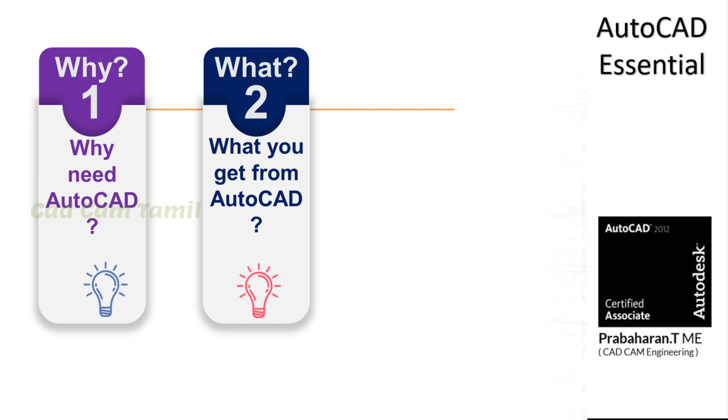Before entering into the session, let us discuss the basics of AutoCAD Essentials, why we need AutoCAD, what we are going to learn, and how we are going to approach it. First, let us discuss why we need this AutoCAD.

Before that, let us discuss the basics of engineering drawing. Now you have two drawings: one is a tree, another is a car. Let us make the difference between these two. The first one, a tree, is nature. The other, a car, is artificial.

In a similar way, the tree does not have any prescribed shape and size, while the car's each and every part has a prescribed size and shape. A car will move from one place to another; a tree does not move. We can describe the difference between these two in many ways.

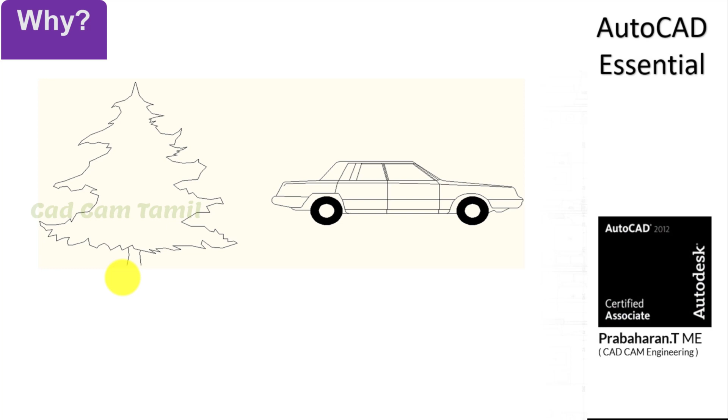So in general, in engineering drawing, we can say the tree is a sketch and the car is called a technical drawing. The tree does not have any prescribed size and shape, so it doesn't need any engineering tool at all to draw such a tree or plant.

But coming to the technical drawing, the name itself describes that it needs technical input and technical tools. Every part of the car has a prescribed shape and size. It needs some extra, specified tools, just like a compass, protractor, scale, to draw such a shape properly. That is why it is called technical drawing.

Why are we talking about technical drawing? This AutoCAD program is going to help you draw such technical drawings. Using the drawing only, we are going to fabricate, build, and manufacture. So we need a common platform.

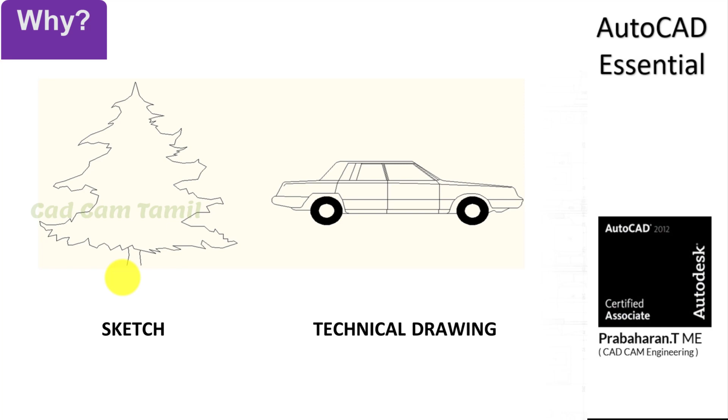Now let us discuss. Imagine we are going to build a new design or new car for the future. Before going to build a new car, let me know your basic knowledge of engineering. So we will do some kind of role play or funny kind of activity.

Let me ask you one thing: can you draw a rectangle? I will give you two minutes. Please draw a rectangle. I'm going to try with you now. Right, I've drawn a rectangle. Some of you drew it, some of you didn't.

Why? They need some more data. What is the data? They need some measurement, right? Now I'm giving the measurement: draw a rectangle of 50 cross 25. Now you have the measurement.

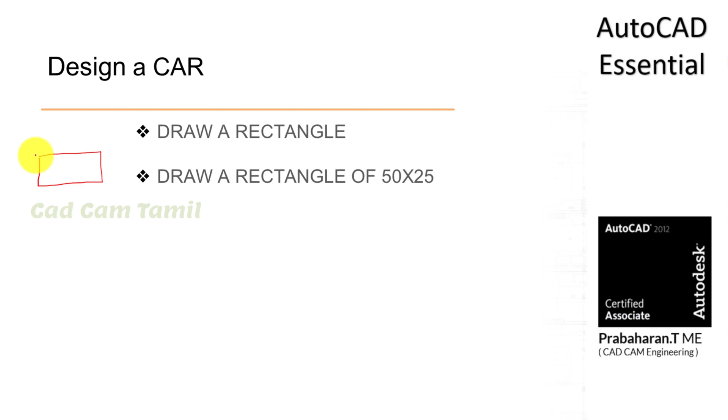Can you draw now? Now my second attempt, I'm going to draw again. I've drawn a rectangle of 50 cross 25. Still, some of you drew it, some did not. Why? They need some more input, some more data. What is that? I said 50 cross 25, but on what unit is this 50 cross 25? So they need a unit, right?

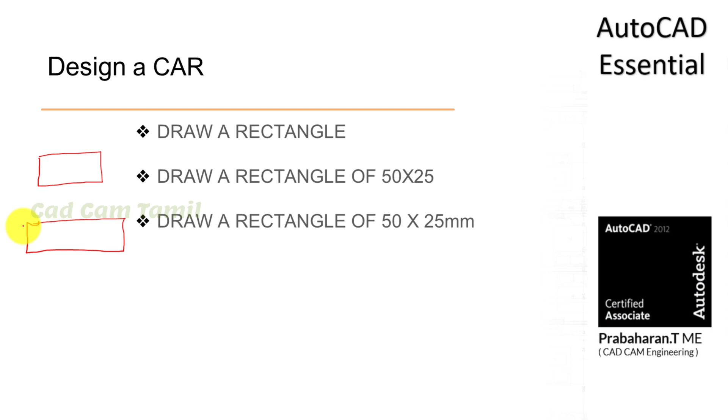Now I am giving a unit: mm. Now we are going to draw the rectangle without a steel rule, without a scale, because we are very familiar with those instruments since childhood. So you know how much 50 mm is, 5 centimeters, 2.5 centimeters. Keeping that imagination, we are going to draw a rectangle. As an engineer, we should have a good imagination capacity.

Now please check the rectangle you drew among yourselves. Somebody drew horizontal, somebody vertical, somebody inclined, all are rectangles only. Apart from that, some of your rectangles are small, some are big. According to their imagination, 50 by 25 is different each way, so it cannot be the same for all. It is obvious that human error is acceptable.

This kind of human error will not be acceptable when we go for designing some instruments, when we go for designing and manufacturing some components. So what do we need there?

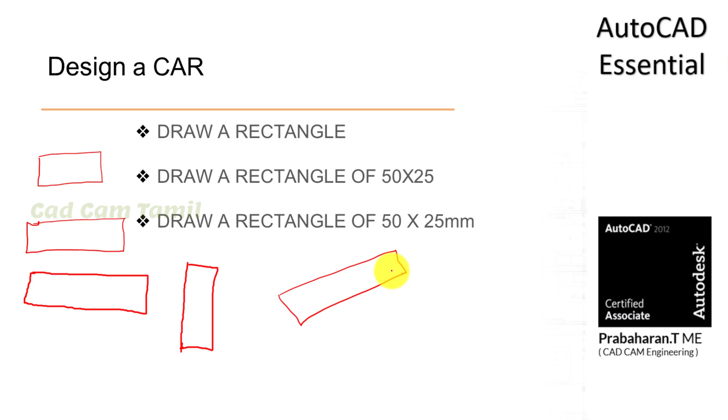We need a common platform, a universal platform, a global platform that will allow us to draw in a uniform way. What is that? That is called AutoCAD. Still, we have to discuss more about this AutoCAD in the future.

Next step, what we are going to learn from AutoCAD, what it has, we are going to discuss now. So AutoCAD is a common tool for all engineering. For example, if you are a mechanical engineer or a civil engineer, the same AutoCAD tool is used to produce a drawing.

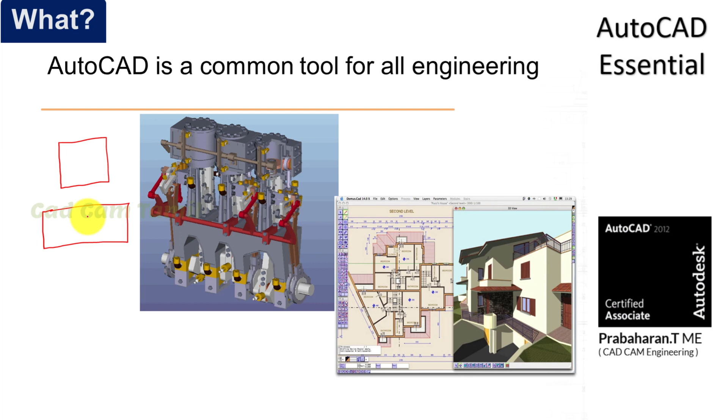For example, a mechanical engineer is drawing a square box. What do they say? They say it is a box. The same drawing, if drawn by a civil engineer, they will say this is a window, this is a door. The same way, if this rectangle is drawn by an electrical engineer, they say it is a motherboard, a circuit board. But see here, the object is the same, but the perspective of the view is different.

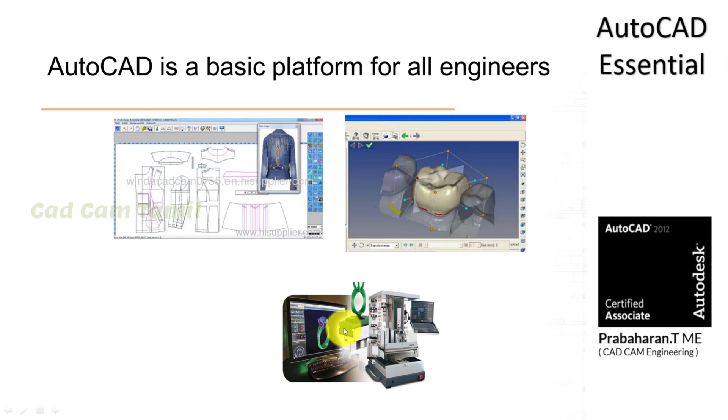Similarly, it is used for textile engineering, dental design, and jewelry making. And we can use AutoCAD to create two-dimensional drawings, orthographic views, front view, top view from the three-dimensional, or directly we can draw front view, top view, side view.

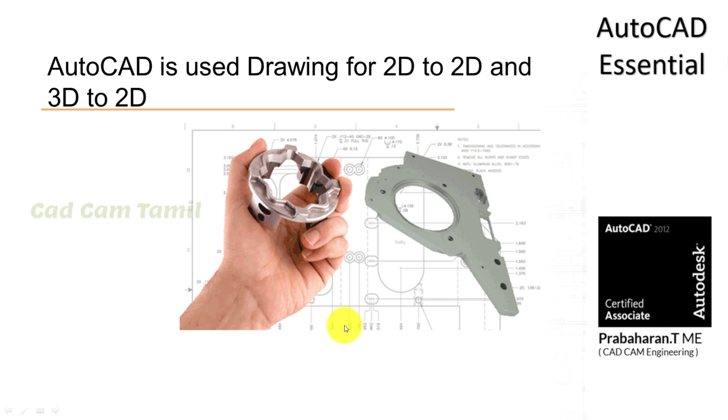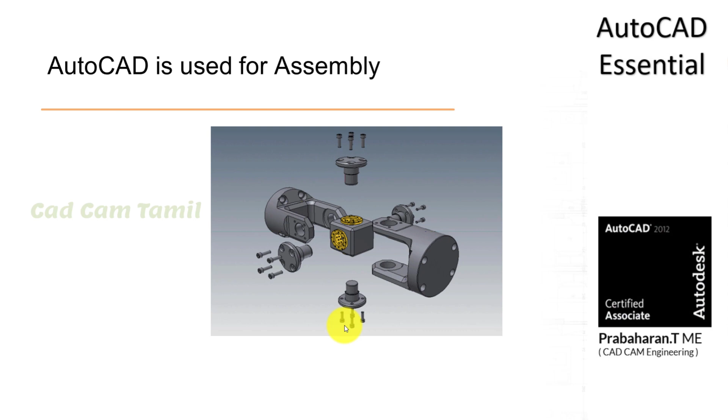And real assembly - if you have a physical product with you, how will you assemble it? In a similar way, you can model in 3D and assemble in a real way. Then we can do three-dimensional modeling as well as surface modeling. Surface modeling is extensively used to design vehicle bodies, aircraft bodies. This is the simplest best tool for them.

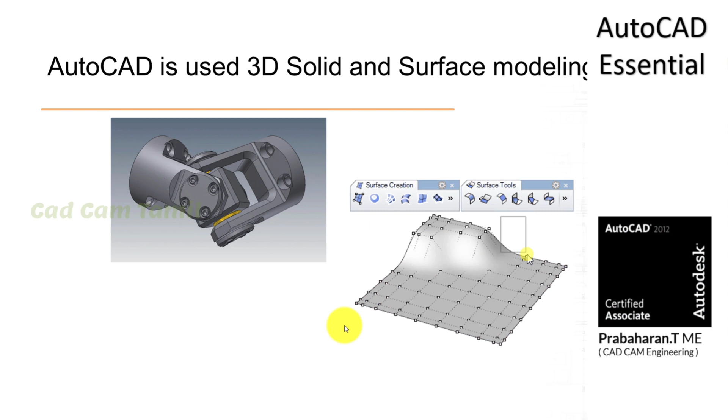Next, data migration. Data migration means what? Don't think AutoCAD is the only software available for designing. Apart from AutoCAD, we have plenty of software across the world: Unigraphics, Creo, Pro Engineer, SolidWorks, CATIA. These are different programs related to CAD. You can transfer your drawing from one software to another software. This is called data migration.

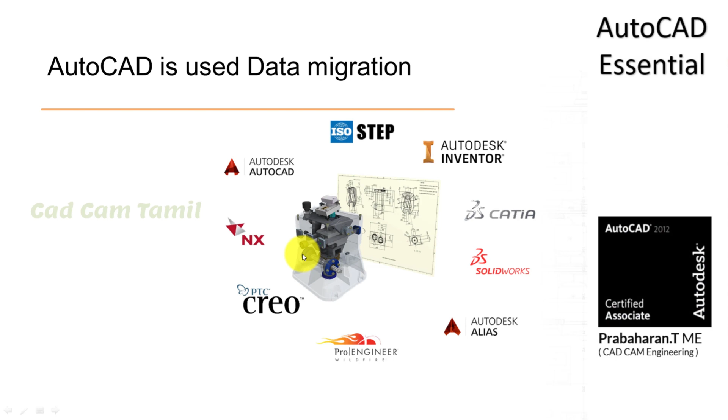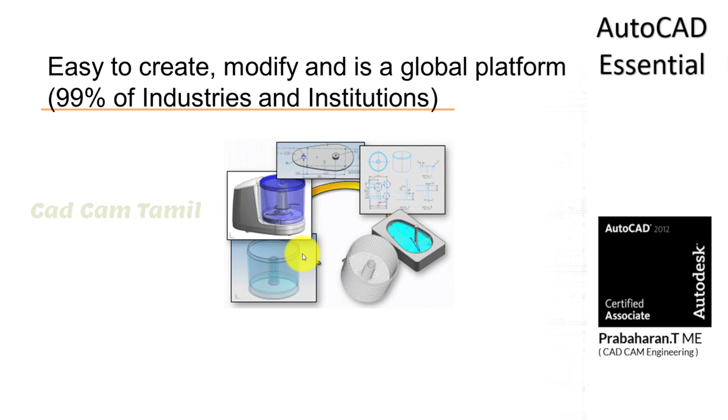Around 90 to 99% of institutions and industries nowadays are using the AutoCAD program for designing. Why? Because it is very user friendly, easy to create and modify.

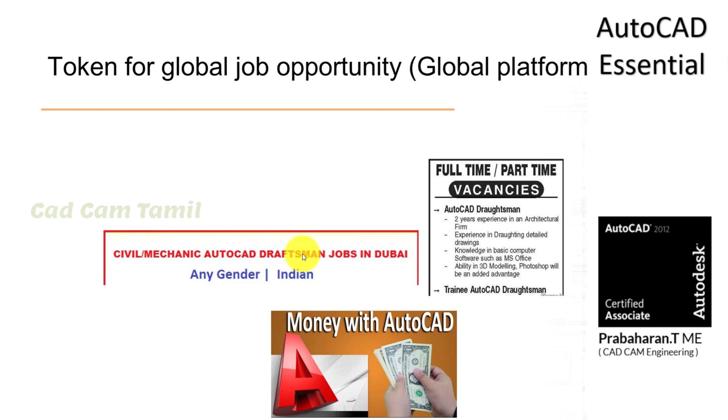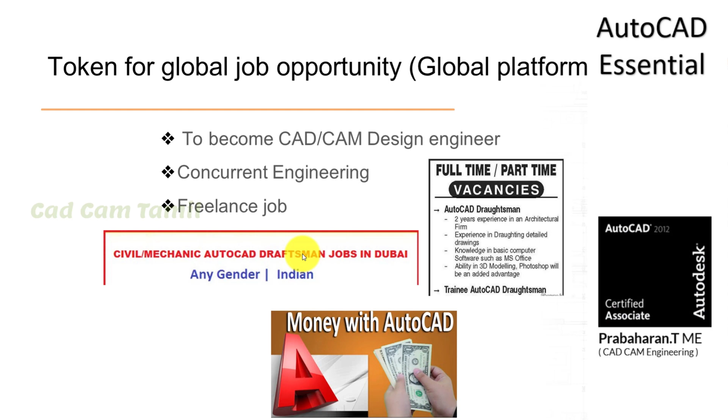Apart from this, once you know AutoCAD, it will create job opportunities worldwide. Why? Because we are using a global software manufactured by the Autodesk company. I said 99% of industries and institutions across the world are using it. So once you know these AutoCAD essentials, you are eligible to get a job anywhere in the world. Apart from this, you can do freelance jobs and communicate with engineers across the world. That is called concurrent engineering.

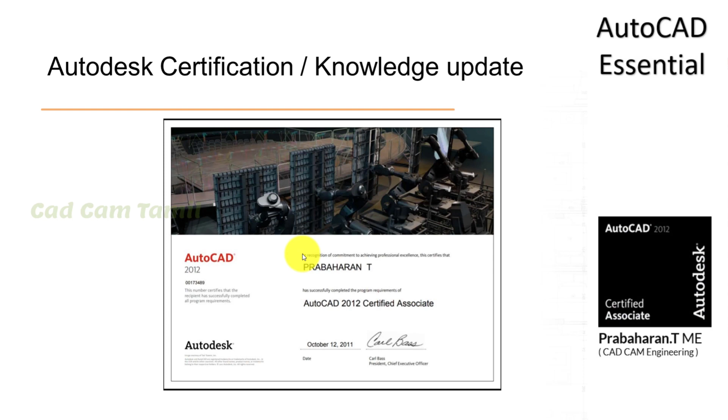Finally, you can become a certified CAD engineer through Autodesk. So this AutoCAD Essentials course will lead towards this certification. This AutoCAD Essentials will give you the fundamentals up to the expert level of AutoCAD.

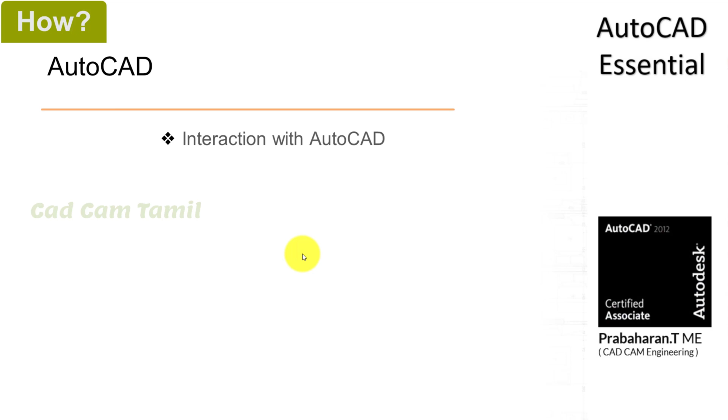Next, how are we going to approach and communicate with the AutoCAD program? There are three ways: one is through command prompt, another is menu bar, another is toolbar. What is meant by command prompt, menu bar, and toolbar, we will discuss in the next session.

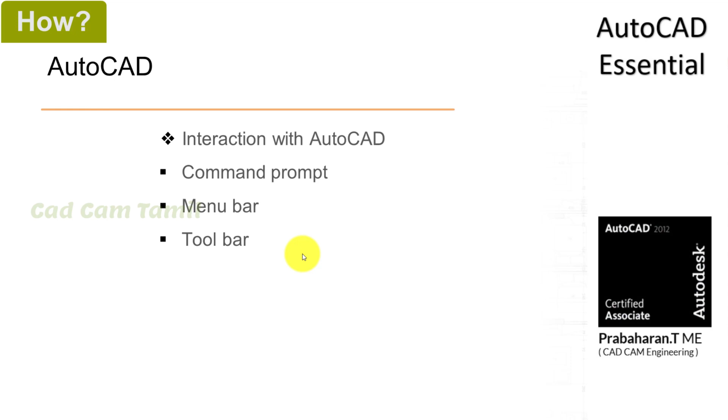Each session we are going to have hands-on practice. First we will discuss the concepts, commands, and basics of the commands. Then we will practice with live examples.

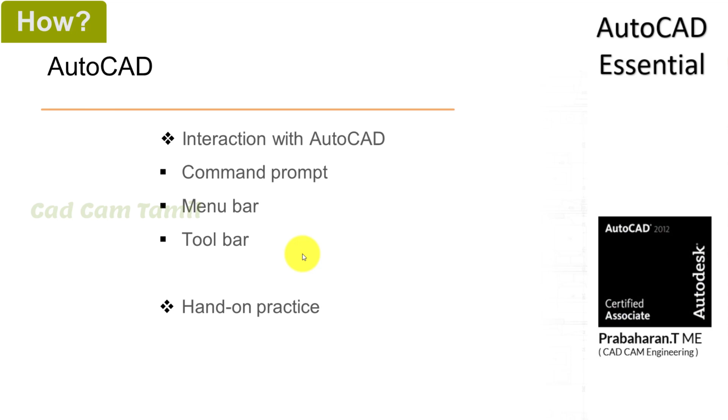How was the design department before the computer? Before the computer, it was completely manual - drawing by manual, checking by manual, inspection by manual. We needed a huge drawing board and paper, tools, and a separate storeroom to keep those drawings safe. There were a lot of difficulties.

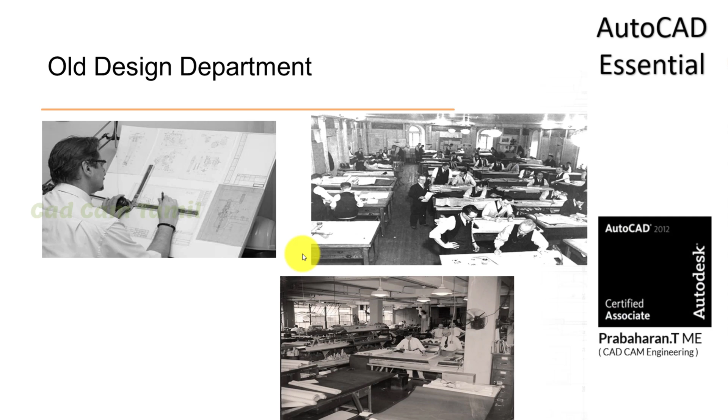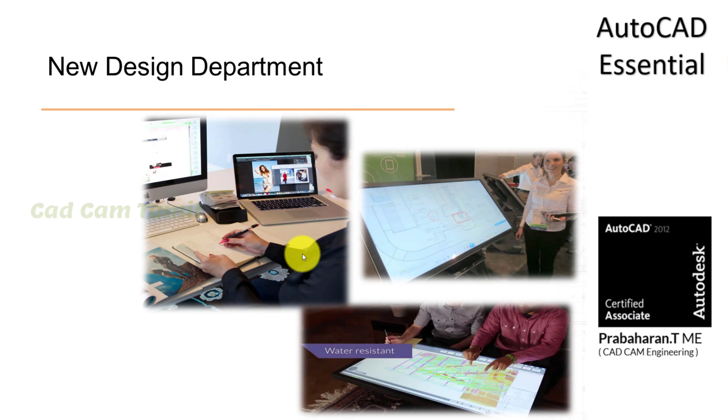But nowadays, all things are replaced with a simple computer. Designing, modification, inspection, visualization - everything has become very colorful, enthusiastic and aesthetic. That means easily we can create, modify, edit. It's an easy way to bring your idea onto the computer and make everyone understand.

So with this, we are going to end the introduction of AutoCAD Essentials. In the next session, we will discuss the AutoCAD introduction.